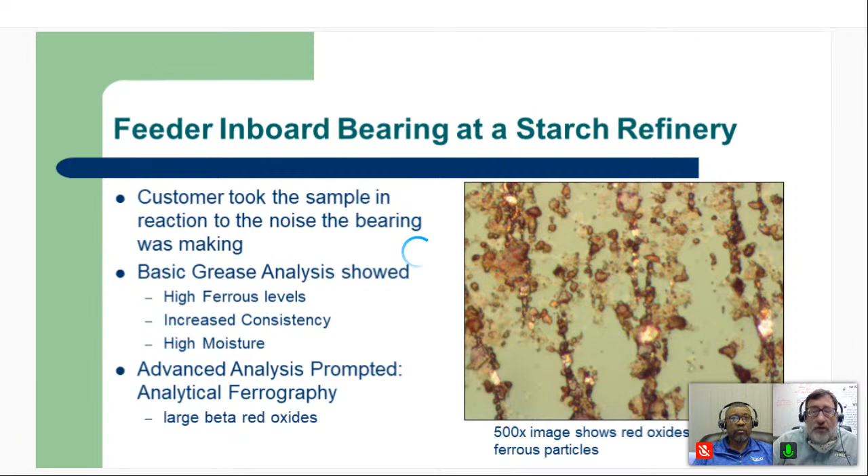That prompted some advanced analysis, and part of that follow-on test slate included analytical ferrography. Analytical ferrography showed some large beta red oxides. You can see a photograph here of those. These will form from poor lubricating conditions, for example, if you have high moisture levels in the load zone, and that corresponded to the ppm levels that we were able to measure in the grease for the moisture that had gotten into that bearing housing.

So what do we do about that? In this case, it was some grease flushing to try to clear out that accumulated moisture. Also inspecting the seals to see how the moisture is getting in the first place, and then identification of that ingression point and correcting that.

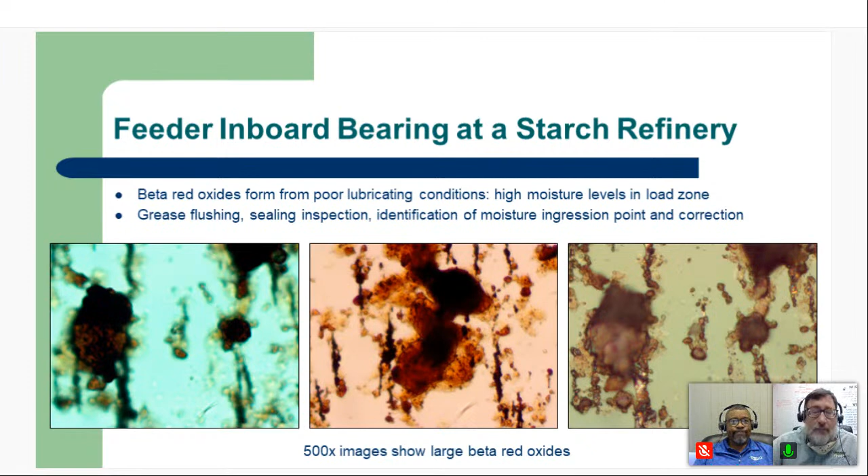So you can see some of these large beta red oxides present in the grease sample after being extracted and analyzed by analytical ferrography. The customer was able, in this case, to identify a specific lubrication issue and change regreasing activities.

That is in comparison to, let's say, if only ultrasound was used, or perhaps vibration analysis. They would detect that the bearing was indeed damaged, that some wear had taken place, and it would change some of the frequencies and ultrasound decibel levels you'd see, but not necessarily pinpoint the source of that.

And that's where grease analysis came in. It not only helps with this particular bearing, but also gives the customer information that can be used to improve bearing lubrication methods across the board for this particular component and others as well.

And then there was some follow-up grease analysis after these measures were taken that confirmed improved lubrication. And that's what really we want to see, is that we want to get beyond this initial event and have reassurance that it's not going to recur and that we've addressed the issues that led to it by improving lubrication.

So knowing about the issue here allowed them to have a plan, know the severity of the damage, and extend the bearing's operation until a planned outage was coming up.

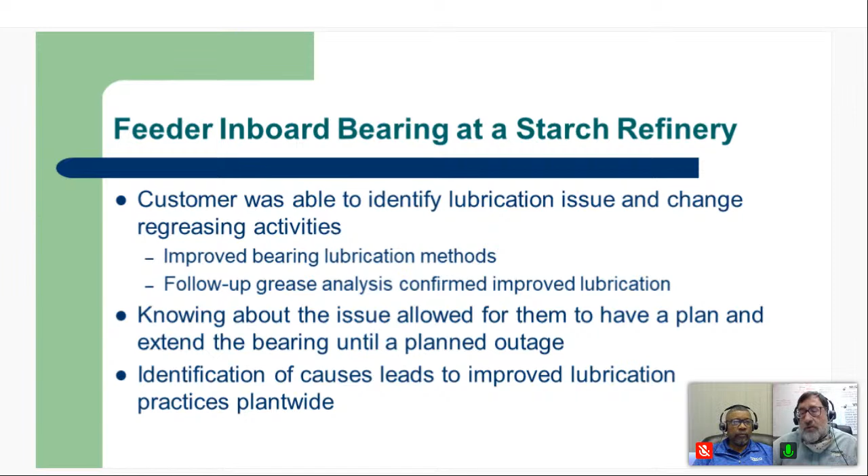And then, of course, we can take some of the learnings here and improve lubrication practices plant-wide. Not everybody does that, but that's one of the biggest values, is to take this knowledge and say, where else can it be applied? Where else do we have assets that are at risk because of that?

We have another one here. We do some root cause failure analysis, and a failed bearing was submitted to us. The customer held on to the bearing in this case, and then just sent us the sample from that failed bearing.

Again, we did the initial grease analysis and found high ferrous levels. We're using a tool called the FerroQ, which is an inductive coil measurement for greases. It's specific geometry works really well with the grease thief and that sampling methodology.

We also saw increased grease consistency here, and we see that sometimes when you get an accumulation of debris. Grease is basically a thickened oil when it comes down to it, and solids will thicken that. If you have wear solids or contaminant solids, they can cause a grease to get thicker as well, affecting its operation.

Our analysis also showed contamination, both environmental contamination, things from the surrounding area getting into the grease and into the bearing, but also mixing of greases. So the wrong grease had been added to this bearing as well.

So the ferrography showed us ferrous wear. You can see the particles lining up in those magnetic lines of force there. You've got some black oxides present, some small and fairly uniform black oxides.

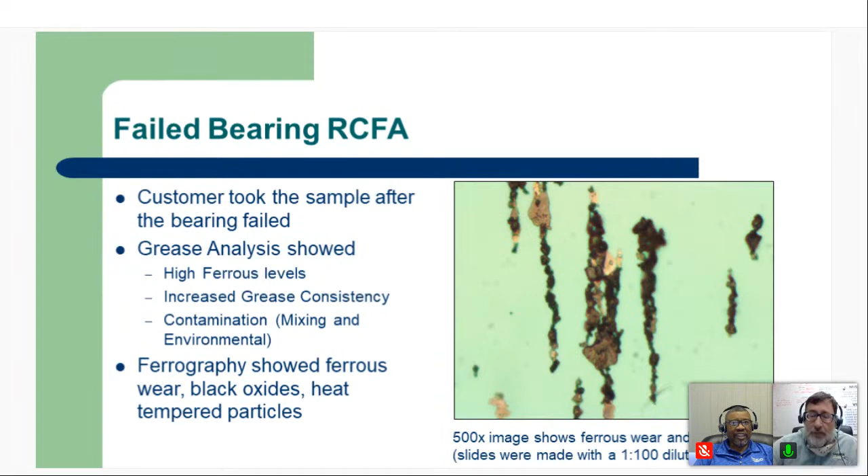Then you've got the black oxides, which are indicative of inadequate lubrication of the surfaces. It forms an oxide. And that's what we got there.

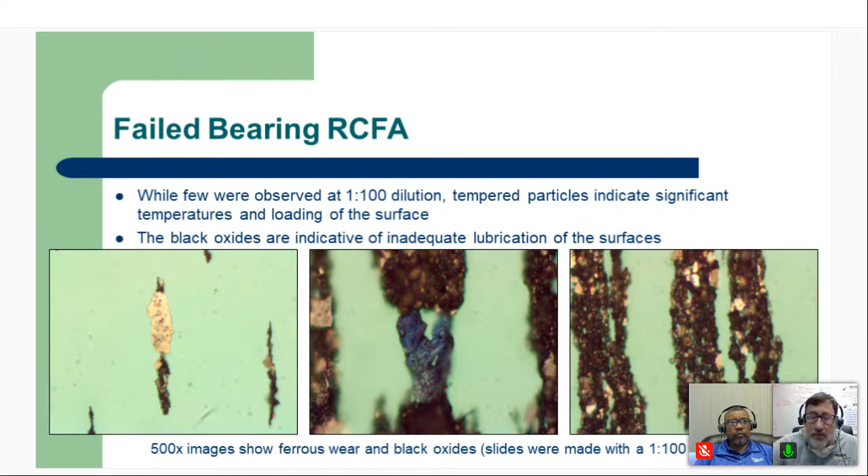So the customer is able to identify, again, a lubrication issue contributing to this particular failure, which helped them to enhance their greasing process or increase it.

And when they looked at the frequency that was needed here, from the calculations you can do, from the data we get from the grease, as well as the fact that this is a high contaminant environment, the frequency of greasing is high enough that they decided to install an auto luber, and then they can decrease the volume of grease being added, but increase its frequency. So more often they're pushing out the bad grease, pushing out the contaminants, protecting that bearing.

They did routine grease analysis, and that confirmed that this new setup gave them enhanced lubrication. And another thing, when you do that with an auto luber, you can actually optimize the frequency of lubrication using the grease analysis data by looking at the condition of the grease that's being purged out.

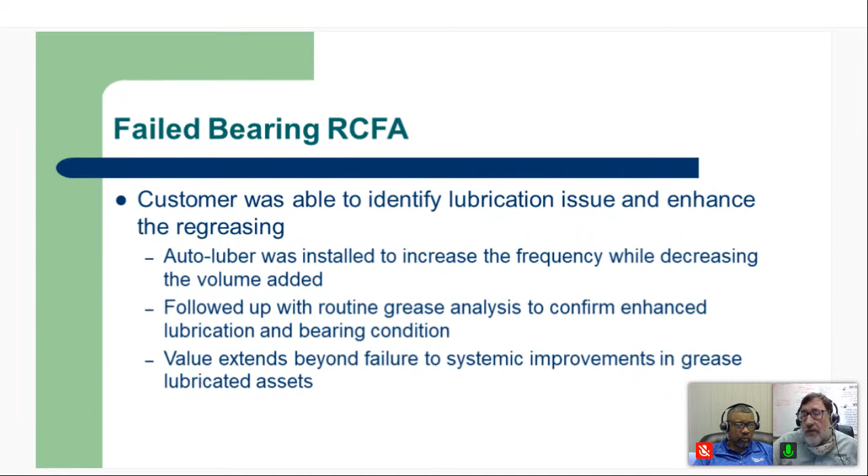And so the value then extends beyond just this one failure, this one bearing, to systemic improvements that can be made in grease lubricated assets across the organization. Got another one here, in this case, from a paper mill.

There's a high pressure feeder, and again, sample being taken after the bearing failed. We'd like the sample to be taken before the bearing fails, right? To find these sort of things, to look at these conditions and changing conditions ahead of time and take efforts to avoid the failure. But sometimes we're playing the catch-up game, and that's the case here.

Grease analysis showed, again, high ferrous concentration in the grease, an increased consistency, and then specifically the contamination here being a combination of moisture levels, which in a paper mill is always a battle, right? You always got high levels of water that you're fighting as it tries to get into your machine, bearings and so forth. High moisture levels, high environmental contaminants, as well as, again, mixing of greases.

And that just shows a lack of control in your lubrication process where either a supplier is giving you a different grease than what you're adding to it, or you've got multiple technicians using different greases. And it does create a problem with compatibility.

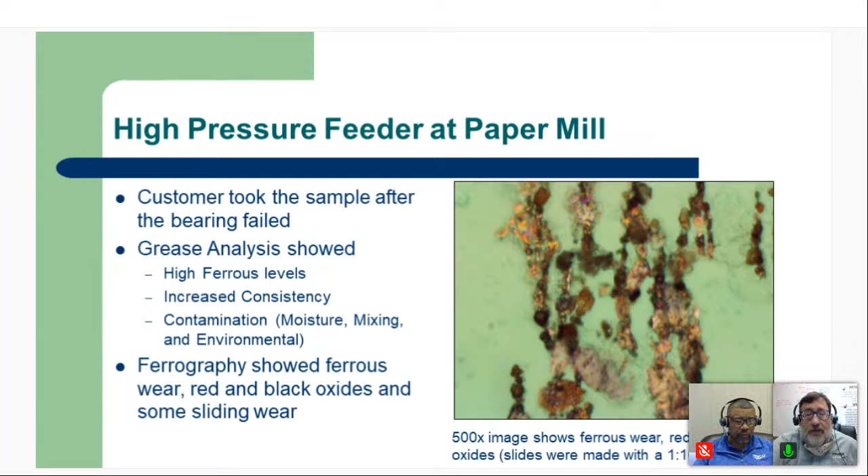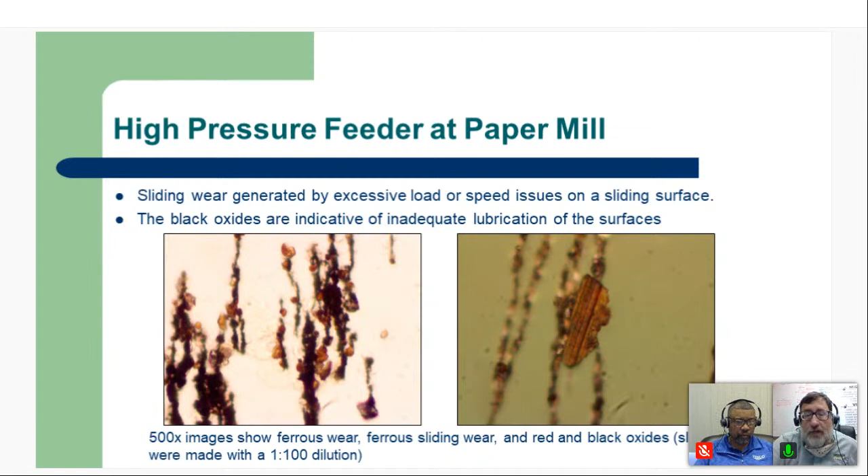So ferrography here showed the ferrous wear that we saw, some red and black oxides, and then some sliding wear, some larger sliding wear particles as well. The sliding wear gets generated by excessive load or speed issues on a sliding surface where you lose that hydrodynamic or elastohydrodynamic film, and you get asperity contact. The black oxides, that's inadequate lubrication of those surfaces. So we had a combination there, again, ferrous sliding wear, the red and black oxides that you see there.

As a result, the customer is then able to identify this as being a lubrication issue. And mixing lubricants has a large negative impact on asset life. Understanding that that's an issue within a facility, maybe not just with this asset, but other assets as well, gives folks an opportunity to address that.

In this case, the recommendation is to use some color-coded or visual indicators to remind the users of the correct grease for the equipment. There's some neat products out there for that, little silicone bands that can go around your grease zerk fittings, and you can put the same color band around the grease gun so that only that color designated grease gets inserted into that equipment, and that can really help when you're trying to make changes there.

Usually you got to add a shape too, because not everybody has that color acuity, and we want all of our technicians to be able to follow these human factored improvements.

But the routine grease analysis would find these issues, like when incorrect grease is added. And if it finds that early, because we're doing grease analysis routinely, we can see that prior to equipment damage, and it can be purged out.

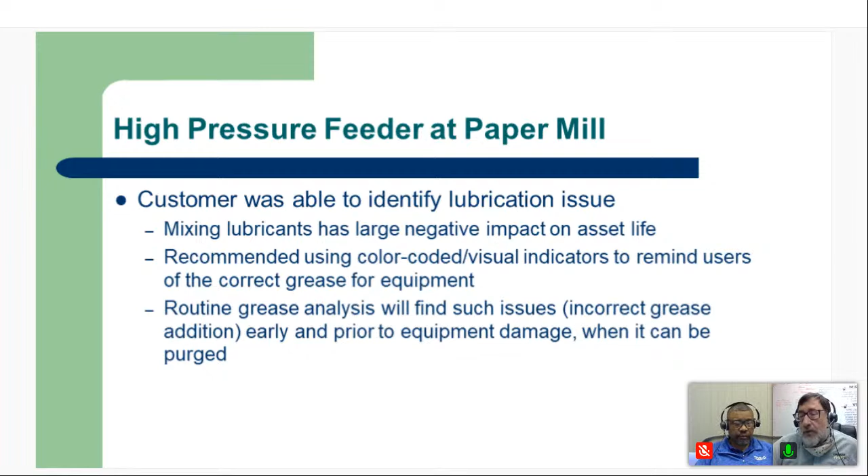So in this case, we had a failure, but it doesn't have to be a failure if we're getting in there to follow up with some more routine analysis and just take that effort to purge out the bad grease, purge out the contaminants, and extend that equipment life.

Here's a wind turbine main bearing, and this is one area that we've seen a lot of usage of grease analysis. Again, we started here with our basic analysis test slate, and we saw some high copper levels. So we're looking not only at the ferrous concentration, which is important in a lot of applications, but it's good to know also when your metallurgy kind of dictates that you need to be looking at your elemental concentration as well.

And more so in greases, we see that you get almost a pure ferrous metallurgy that you're dealing with. So the ferrous debris measurement really covers a lot of bases. But knowing when your bearings have non-ferrous components as well, it says, hey, let's look at that.

So from elemental spectroscopy, we had some high copper levels. We saw increased consistency again. And like I said, it shows up a lot when we have high wear levels.

And this is something that's different between oils and greases. Ray's going to talk more about some oil applications.

In oils, when you are generating wear, you tend to hit this equilibrium particle concentration where the particles are being produced, they settle out, they get filtered out, and they hit this certain level that may be going up over time. However, with greases, it's continuously accumulating, so the particles don't have anywhere to go. So you typically expect higher levels of wear, but knowing what those levels are and then what is considered excessive is important.

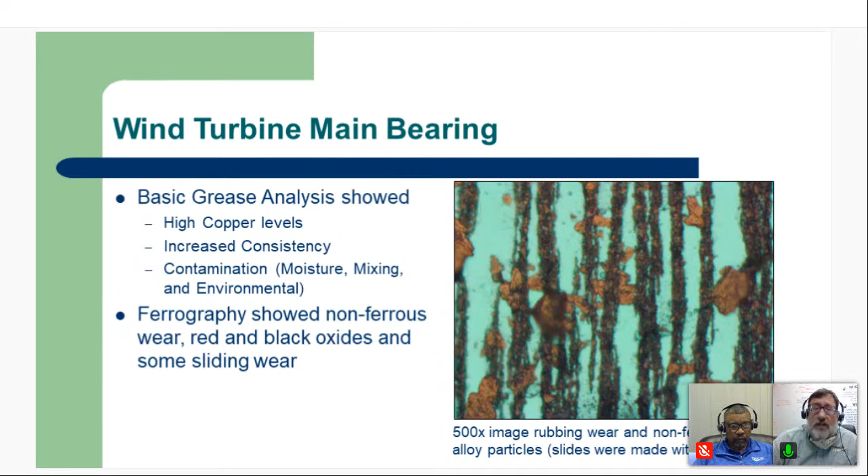We've got red and black oxides and some sliding wear from this main bearing. Some more pictures here. We had to do some dilutions. You can see some very large non-ferrous copper alloy wear, also quite a bit of rubbing wear there as well. And when you think about this being a ferrous bearing, where the rolling elements and raceways are ferrous, but the cage is copper alloy, you're having that rubbing contact to create that wear.

So you're going to get both the ferrous wear and the copper alloy wear. But obviously here, the copper alloy from the cage is producing the largest wear particles, the severe wear particles, and it really has our attention at first.

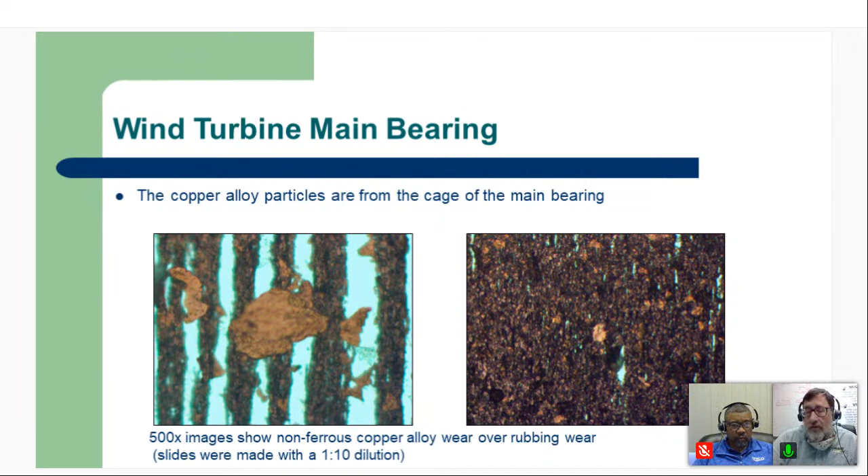So this customer is able to identify this wear issue, and it was again the lubrication condition causing the wear on the cage of that main bearing. You've got excessive quantities of particles that are actually self-feeding into the process, interfering with the effectiveness of the lubricant. They become almost like a lapping compound that increases the generation rate of the rubbing wear, leading to the formation of severe wear.

Cage wear in these large bearings is particularly concerning because it leads to a loss of structural integrity, and eventually you can have catastrophic bearing damage. So the elements start to skid. Sometimes if there's enough damage to the cage, the elements turn sideways, and we see that too. We see this huge sliding wear show up. Now, we didn't see that yet in this instance, but that's something that particular operator needs to think about.

This is what happens, and then ultimately you get a clearance loss. And that clearance, as it opens up on those main bearings with all the forces from those large blades spinning around, can really lead to catastrophic consequences.

So early detection could mean a low-cost up-tower repair. And if you can't fix something up-tower, that means you're bringing in a crane. You're bringing in a mobile crane, setting that up, and you're going to be spending about $300,000 for every event.

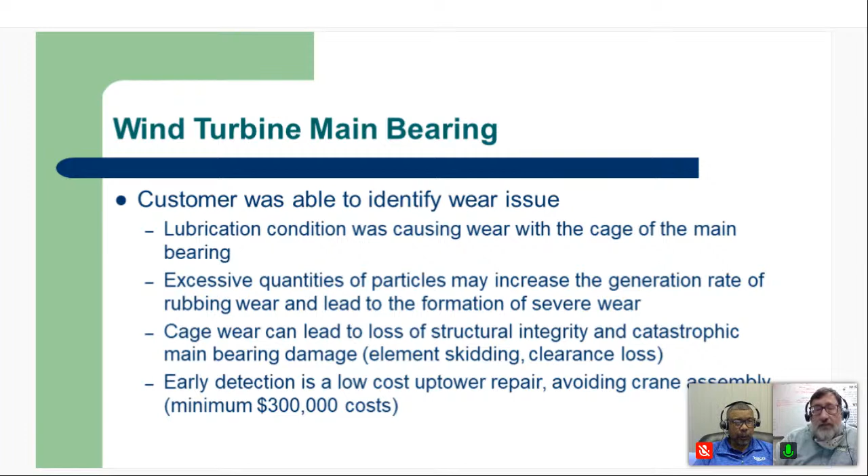I wanted to throw one more in here, which was a big recent one for us, on helicopter grease analysis.

Before we started here, Ray, Richard, and I were talking, and I mentioned how Ray was my first mentor in analytical ferrography.

And I remember that was one of the things he was telling me about—helicopter swash plate greases was one of the things, 30 years ago, that he was doing for some folks. I don't know whether it was Canadian military or who it was at that time, but he brought that up and shared that with me.

More recently, Boeing reached out to us. They were asked to optimize maintenance for the Chinook helicopters—these are the tandem rotor helicopters deployed around the world. The Canadian, the Dutch, the UK, and the US military went to Boeing and said, help us address the maintenance activities here. This is an aircraft that was designed in the late 1950s and went into production in the early 60s.

As I became part of this project, some of the maintenance manuals we were reviewing were dated back to 1962. So you've got maintenance practices that are a bit older than me anyway. Instead, it's like, well, let's base it off data—let's base it off what's actually happening in the field to these assets.

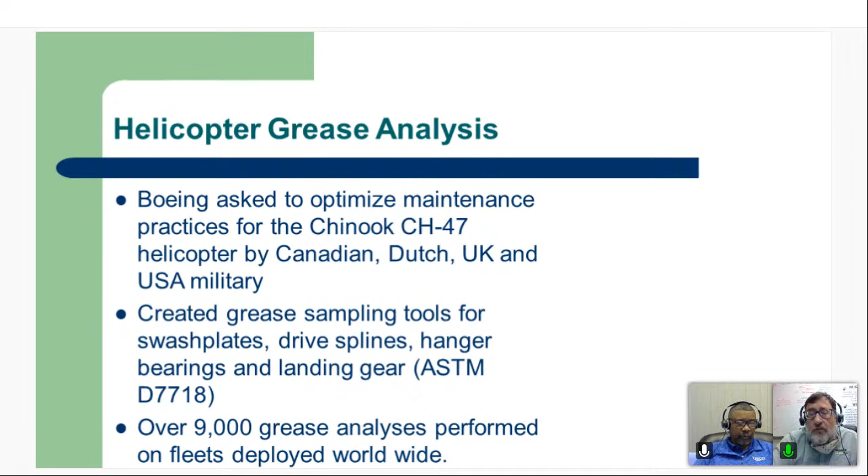As part of this project, we created grease sampling tools for the swash plates, the drive splines, the hanger bearings, and the landing gear, all following the ASTM standard D7718 for in-service grease sampling. We performed over 9,000 grease analyses across all these different fleets, from aircraft in different operating environments.

But this is what we did here. Maintenance intervals had been in place since 1962. The only modifications in that time had been in response to issues, perhaps a previous crash or a near miss type thing. And what would they do? They'd say, well, grease more often. So over time, without data, it was just, whatever it was, let's just grease more often.

So there was this opportunity to look at what is the condition of the grease. By doing so, and using those over 9,000 grease analyses that were done, we were able to reduce the number of lubrication tasks per 1,000 flight hours from 98 down to 56—almost cutting the amount of work in half. And we reduced service interruptions from 20 to just 10 every 1,000 flight hours. So basically, the aircraft is spending twice as much time in the field.

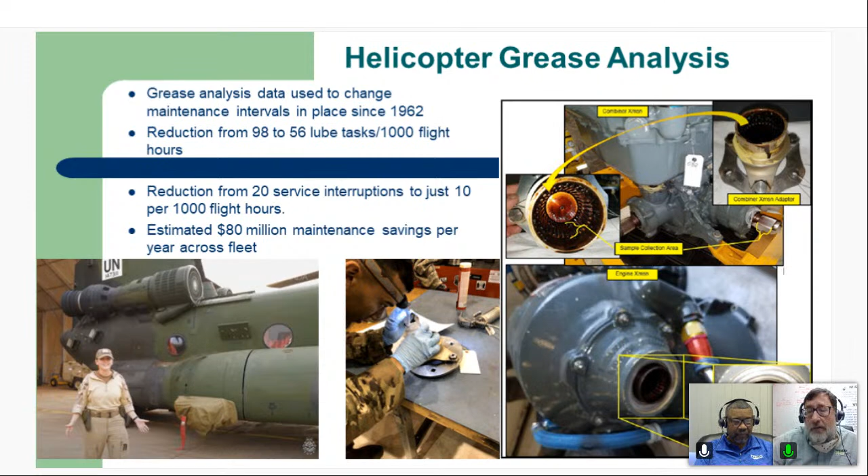So I want to hand that over to Ray and have him share his with us now.

Good job, Rich. That's exciting to see how it has bridged over from what we used to do back in the late 70s, early 80s with the U.S. Army, the Canadian Armed Forces, and then having you checking on these Chinooks, CH-47s.

That swash plate situation is a phenomenon where dust curls up and goes right back into the hub. If you notice helicopter designs today, they have what they call a frisbee on top of the hub, which prevents that type of situation from occurring. So since then, they don't have it as much as they used to, but at least they know what was going on and how to prevent that particular failure from occurring again.

And if I can comment, that frisbee, we had to move out of the way to get our grease sample. But in those analyses, we had seven parameters we were looking at. One was the silicon levels as an indication of sand and dust getting in there. There was maybe one situation, not in the swash plates, where dust was potentially a concern, where you'd have to purge the grease out for that. But most of it was oxidation, the grease coming to the end of its life, and we were changing it out based on that. So thanks for giving us that feedback.

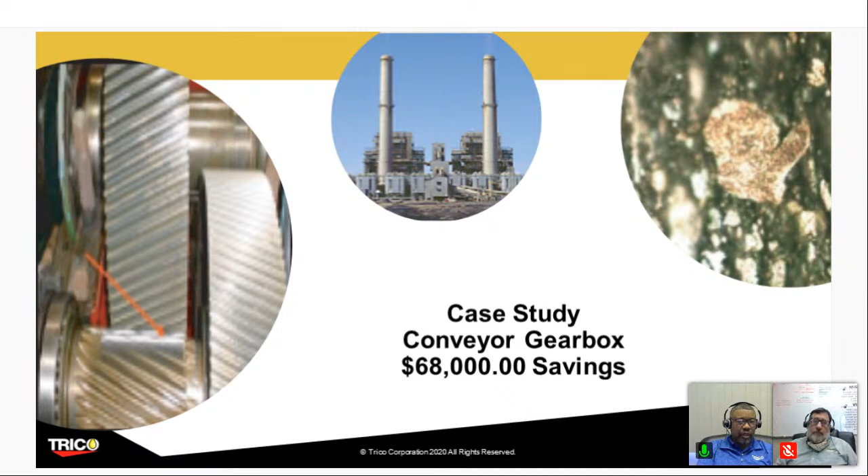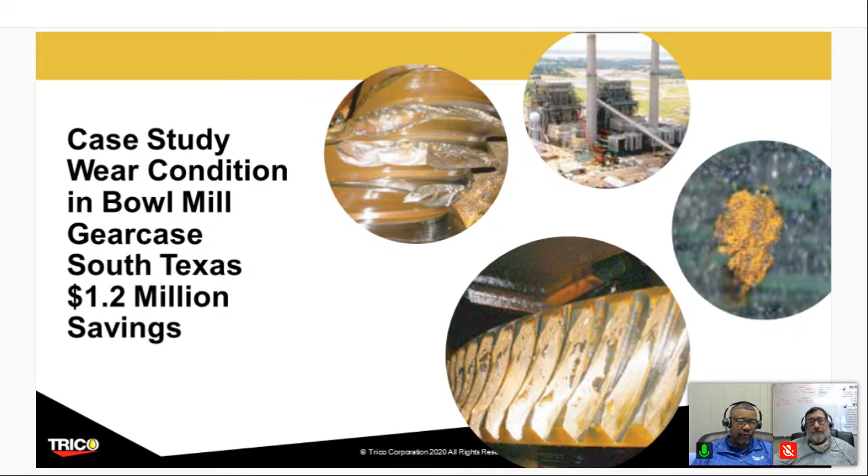In the next slide, I have the animation of the bowl mill, the technical drawings of it on the right side, and the related particles in the middle. This customer was very elated to be able to use the technology of ferrography for long periods of time. To this day, they've been a customer of ours for almost thirty-some years. So we have good relationships with this customer, and they believe in the technology. By virtue of being able to pinpoint exactly what's going on, it makes it that much easier and feasible to point the maintenance crew to the right areas of what's going on. In this market today, no one wants to spend time searching for where the problems are. They just want to know exactly where it is to fix it, because time is of the essence for the maintenance staff and what they do. So I just wanted to share that particular one with you.

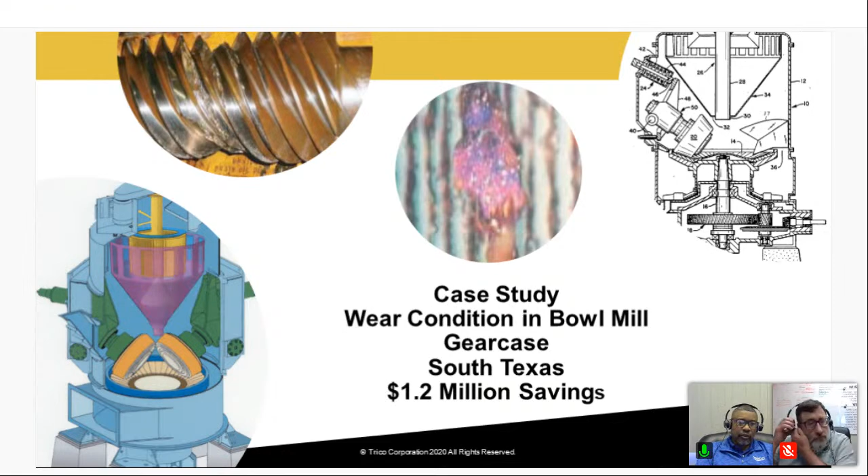We did this on a monthly schedule. They were able to send the samples to us, and this is at the NASA Goddard facility. They have one of the largest clean rooms in North America, I'd say. We were involved with them from the viewpoint of looking at this particular application. What they do is, if you remember the Hubble telescope, they were having problems—not in the beginning, but they found out about problems they had with regard to the polishing of the mirror.

And what happens, they had to go up and make these fixes in space. So what they're doing now is making sure that's not the case here, because this is the Webb telescope. And this telescope is going beyond the moon to take photographs of what's going on.

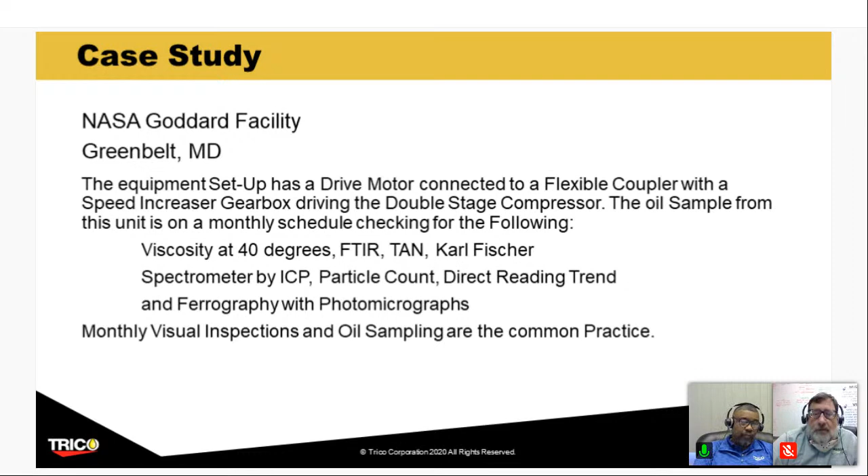So what happened is their clean room had issues with a combination of an electric motor drive, coupled with a coupling gearbox and a compressor. The compressor brings the temperature down into the clean room environment to make it super ultra clean, and having that environment allows them to polish the mirrors for the Webb telescope. It's named after James Webb, who was very influential in the Apollo program, an administrator in that area.

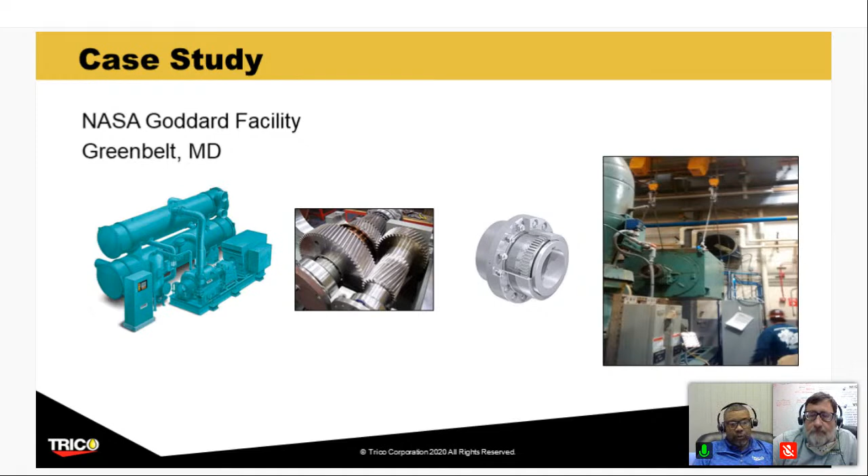So what you see here is a compressor, a gearbox, a coupler, and an electric motor. The electric motor was having difficulties, with oil all over the place that we were able to get sampling from. You can see it's a York double stage compressor. Funny enough, the town of York is where Rich is, so that's what helped me pick out one of these presentations, and I figured I'd give him a little kudos on that too.

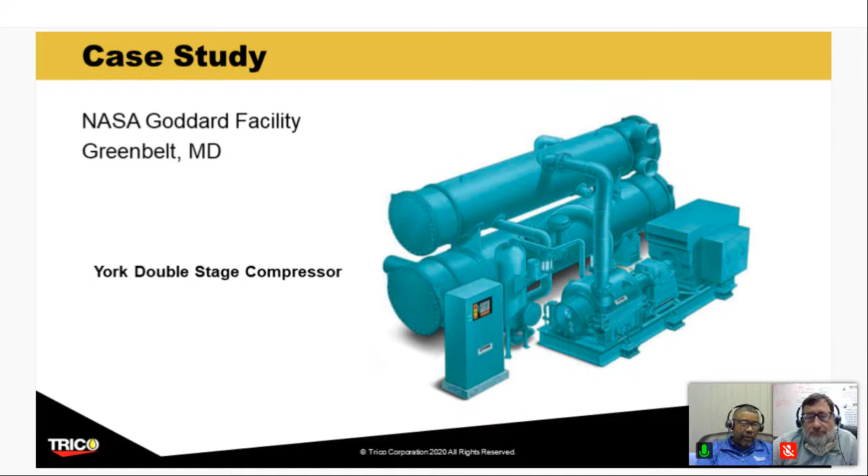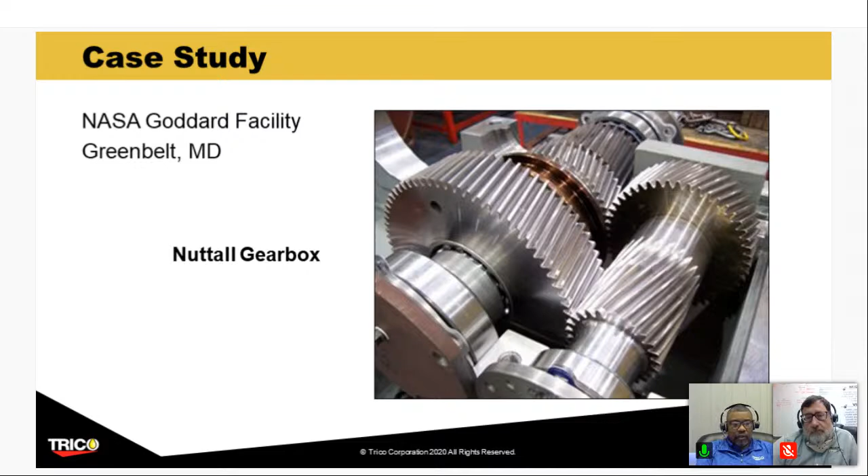But in this particular case, we were able to focus in on where the problem was, and that was from the area of the electric motor. It's a large, 4,000 horsepower motor, that type of thing.

This telescope was supposed to be up in space by this time, but there are delays, inspections, all kinds of different things, because they don't want to put up something they'll have to go and fix. Guess what? It's not a quick trip to the orbit of the Earth, it's a trip to the moon. This is where the Webb space telescope is going.

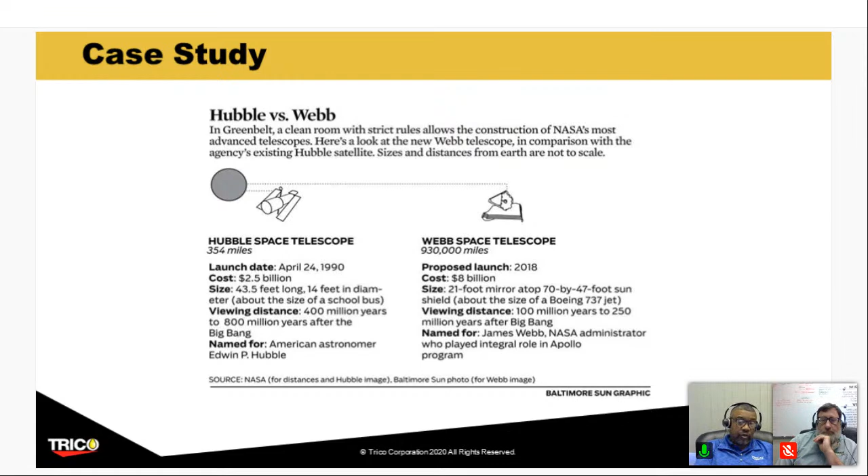So that's why there's so much contingency, so many different things going on to make sure everything is spot on perfect. The size of the Hubble is almost 43 feet long. For the Webb, it's almost 70 feet long, basically the size of a Boeing 737 jet.

In this case study, you can see where the Hubble telescope is, and guess what, the Webb telescope is going to be beyond the moon rather than encircling the orbit of the Earth. You can see this is the mirror of the Hubble, and these are the mirrors of the Webb space telescope. So you can see it's a dramatic difference in that direction.

So what happened here is whatever we were doing was basically messing up the timeframe of how fast they need to get this going. The good thing is we were planning and monitoring the situation. The first report showed a critical issue back in July of 2014. They were not planning on this, they weren't used to monitoring what was going on.

They had normals all the way across before, and all of a sudden they had a marginal, and then all of a sudden a critical occurred, both in the lubrication and the equipment condition basically was starting to have effects on the problem.

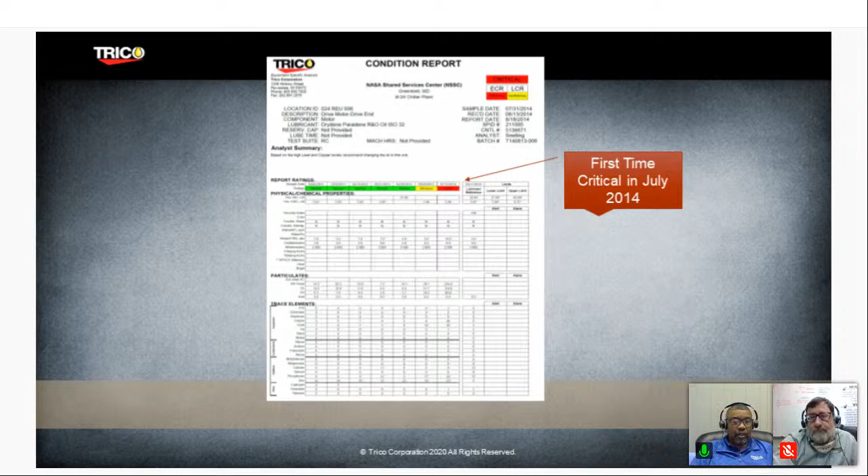So what we do is basically monitor and resample, because you don't want to err on this. You want to err on the side of caution, not on the side of shutting it down right away and messing up production. So we started trending the WPC with the DR, and we also started trending the wear metals with the ICP.

Both were indicating that the wear rate was going up. Rich had mentioned that we have an equilibrium situation with regards to taking analysis. So every time we have a sample, it basically gets to a normal level, and then the larger particles start to trend upwards. This is what you're monitoring here, the larger particles going up in this direction. On the spectral side, we're also trending the smaller particles that are going up too, so not only are we getting large, but we're also getting small, and that tells us what's going on in the situation.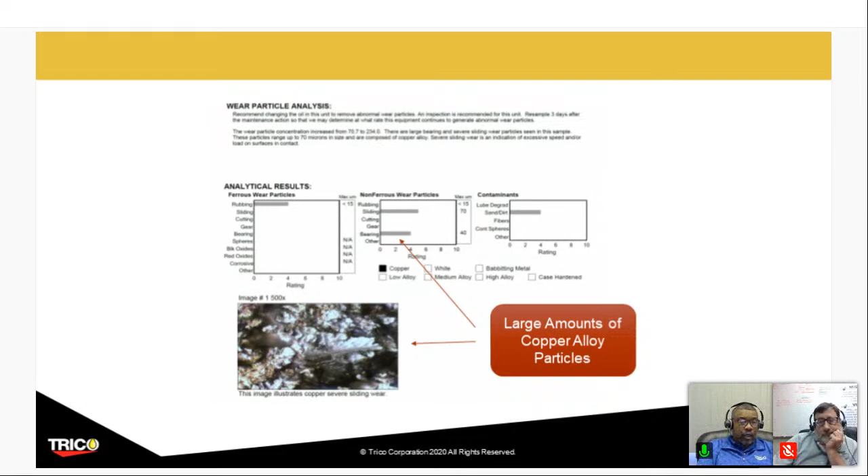So we told them that they needed to take a quick look at what's going on, and they couldn't afford the time frame to do so. So literally what they did was keep changing the oil every few months just to limp this thing along, because they wanted to keep the clean room environment clean, and we're praying and hoping nothing shuts them down. They had backups after backups in play, but they still need to use the machine for bringing the torr levels down to a certain area. So we saw three criticals in a two-year span with oil changes occurring.

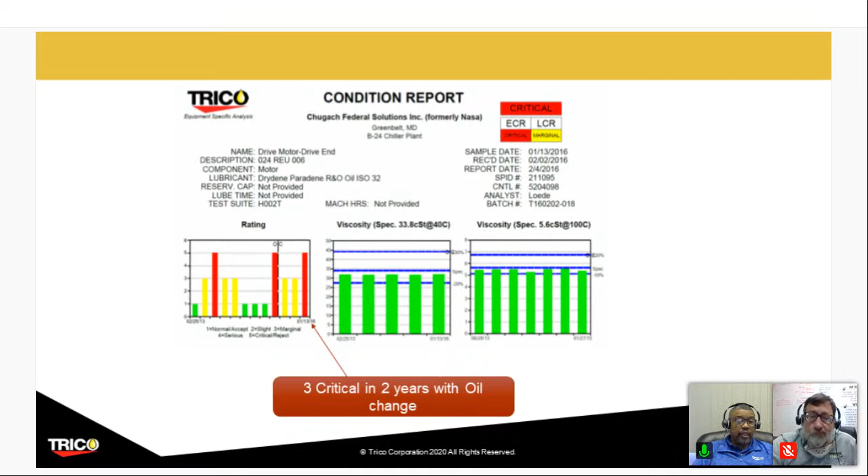Now, once we saw that last critical with these large, humongous sized particles, we said, guys, you're going to have to make a move. Something's going on where the particle count is getting really elevated. The wear metals, the contaminants, everything is starting to climb up.

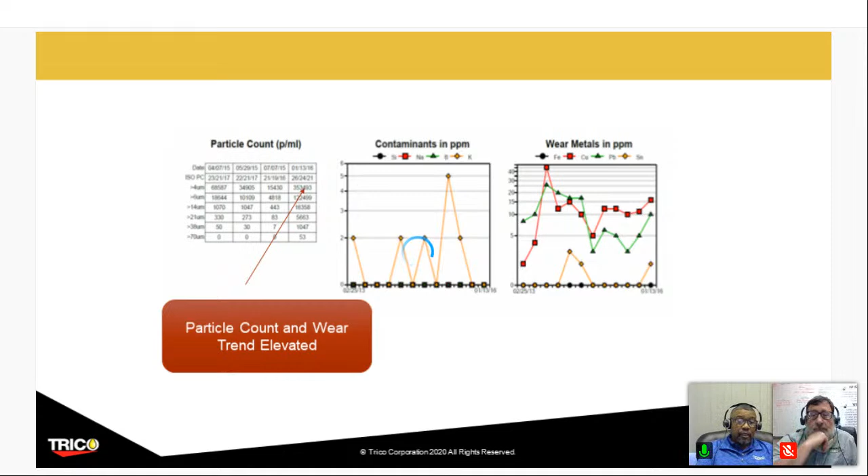So we provided a report. We saw the particle images. We said, come on guys, this thing is laden with all kinds of copper alloy. If you keep going this way, you're going to have a catastrophic failure, and you don't want that. That could mess up the situation with debris and contaminants flying possibly back into the clean room environment. Yes Rich, you were looking... oh, I thought you were going to ask a question. So you could see there were different types of photos: large copper alloy, bearing wear particles.

The thing I noticed when Rich was showing his photomicrographs of the red oxide, there's a phenomenon you have to make sure of. Sometimes these red oxides may look like metal, and you must turn off the top light and turn on the bottom light to actually see the light go through the red oxides to indicate that it's red oxide. These are different tidbits you have to know in terms of monitoring the ferrography, the photos, the particles in analytical ferrography. So that's part of what we teach sometimes in our classroom, some of the tidbits to notice what's going on.

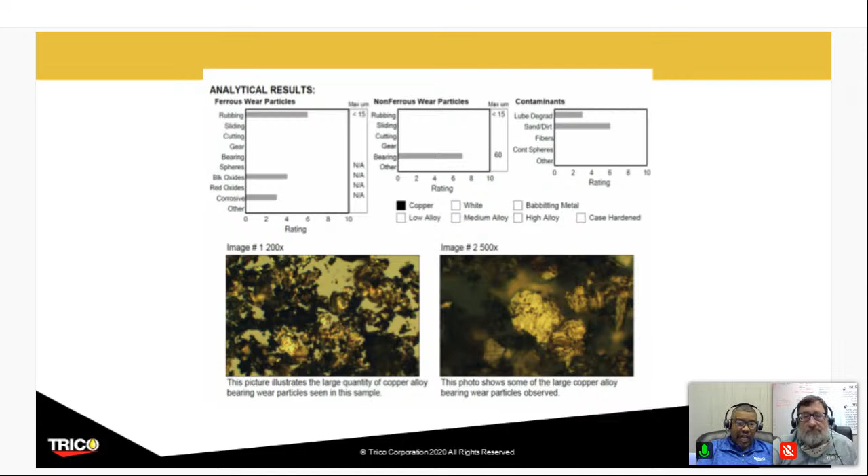But these photomicrographs are at 200x, this one's at 500x. So you've got to know what the magnifications are, what the dilution factors might come into play, and so forth. And mind you, this is oil related. You can see they're not lined up in strings of ferrous debris. They're all copper alloy, and that's not a good sign, if you know what I mean. So when we saw that, we said, listen guys, we've got to start figuring out what's going on.

So they stopped, took it apart, and basically looked at the electric motor. What they found was that the cost for doing this was not exactly what they wanted to spend, but it beats having to spend $8 billion on a lost telescope, if you know what I mean. So that's a little nothing compared to $8 billion, $80,000.

So they scheduled the maintenance and got it repaired. Then we asked the repair people, with NASA's permission obviously, can you at least give us some photos of what you saw, what transpired, what kind of parts are broken, if any. Typically most customers don't reply in that fashion because they like to keep that buried and not admit that any of their machines are running imperfectly. But the vendor and the government said not a problem - this is a good learning lesson tool, so we're going to pass it on to you, and that's what we saw here.

So the awareness of the drive motor issue was labeled on the watch list. This motor was about 31 years old, but it was scheduled for repair. The repair happened quicker than they anticipated, so it wasn't budgeted for the upcoming year. But after the latest critical review, they said let's get this all squared away, and we would not lose any downtime whatsoever. So our investigation, along with theirs, indicated that they needed to filter their oil coming into the facility.

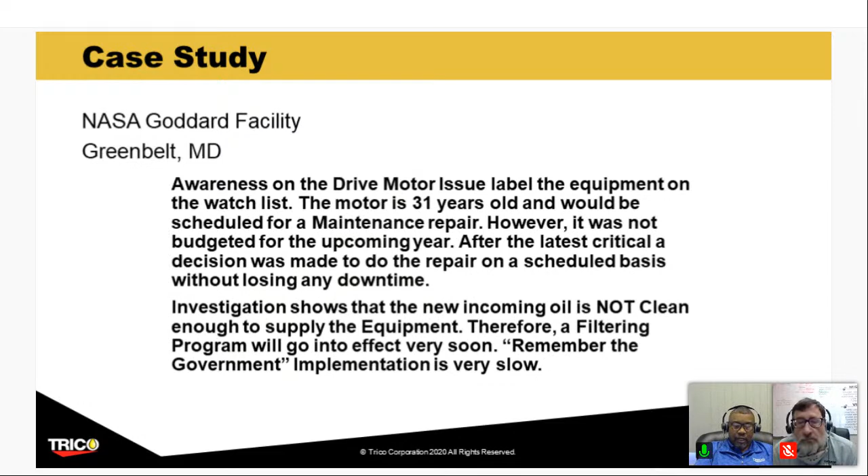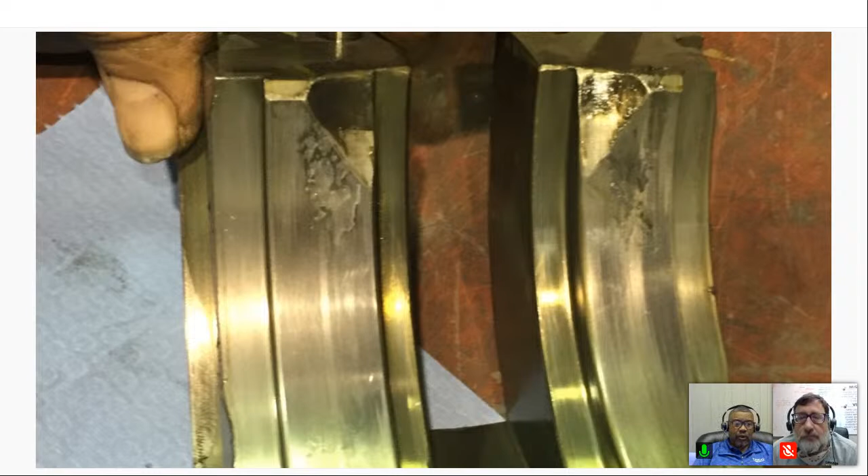So the next few slides are just little indicators of what the parts looked like after they did their inspections from a maintenance viewpoint. As you can see, there's some really gouging metal from their bearing area, and you can see it's obviously copper alloy from these bearings here. You can see this one is a drive end - that's what DE stands for - where you can see more damage going on with the bearings themselves.

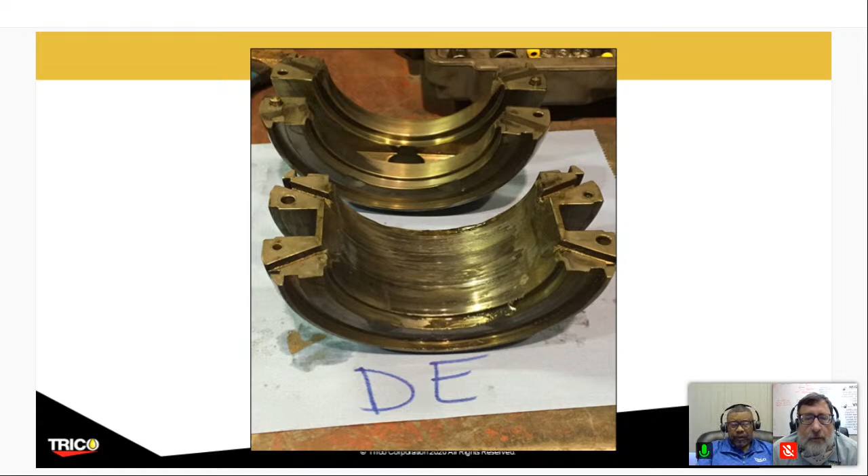Again, copper alloy material, just showing what's going on - you can see all these different catastrophic type situations that could occur. You can see how it almost just slides on the bearing right there, and the gouging that's going on. That's where you see a lot of what I call severe sliding wear on the copper particles. We were measuring 70 to 90 microns in size over a period of time.

So they basically cut it too close, in my opinion, for condition monitoring. This is basically a repair situation, and it's not what I call predictive maintenance in any way - it's completely opposite of that, if you know what I mean. It's almost to the term of failure analysis, which Rich was talking about earlier, but the motor was still working in regards. Here's another copper alloy material, basically shedding away into the lubricant itself.

So with that, I know we have plenty of time, but I was hoping some questions might come up. But I just want to first thank... well, let me show you.

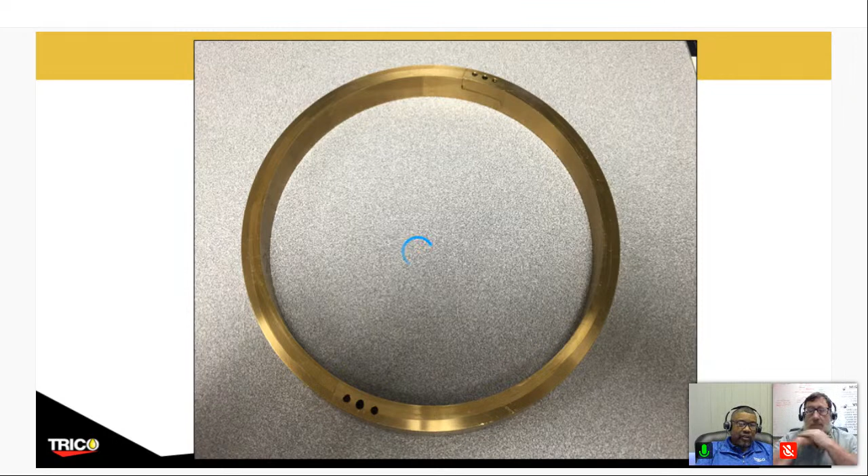So when I saw this, I enjoyed the fact that I was able to be part of this in terms of seeing this take off soon.

And when it does get successfully deployed, I'd be proud to say I was involved with the Webb telescope, hopefully working properly and giving us the images we're looking for in regards to deep space activity.

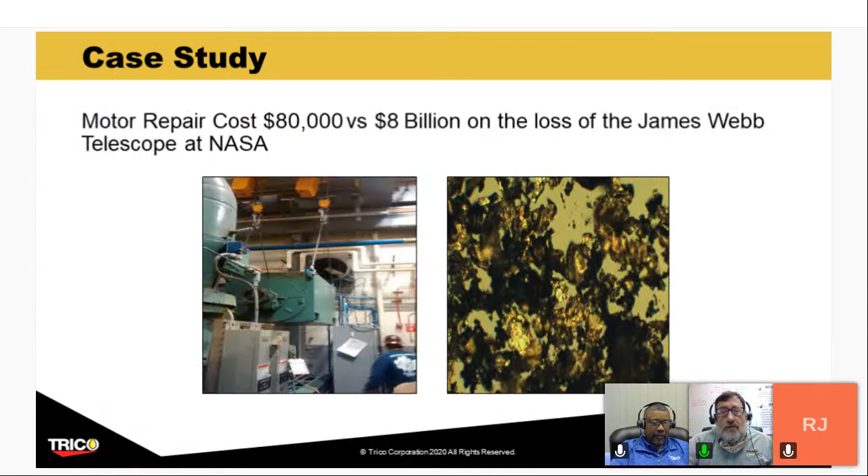Hey, if we could go backwards a little bit, I wanted to point out something in your presentation, and maybe I'll see if I can take us back where I want us to go here. When you were talking about this York compressor, thanks for the York shout out there, you mentioned too the flexible coupler. I just wanted to mention that, and you shared with us oil analysis from the motor side, that was what you were focusing on there. But obviously then there's the chiller, and it has lubrication, and that's a very complex lubrication system there with the chiller fluid and the oil, and they get together and things like that. But on that coupler, that really caught my attention. I was talking to Richard before we started here, because soon after you trained me and set me up, and we built that laboratory, and you went back to Ohio.

I was asked to investigate a problem with Amerigear flexible couplers, which are grease lubricated. In my plant, they were feed water pump couplers, coupling a large steam turbine to a feed water pump. We were having issues, and the interesting thing was that the mechanics, when they looked at it, identified that the couplings were rusting out, because they saw a reddish dust instead of the grease they knew they had put in when they set this up. They said, well, the grease is gone and now they're rusting.

That gave me an opportunity to look at this further, to take the residue and find that in fact the grease is still there. I found evidence of the grease, but the particulate was a red and black oxide, very uniform, and clearly a sign of fretting.

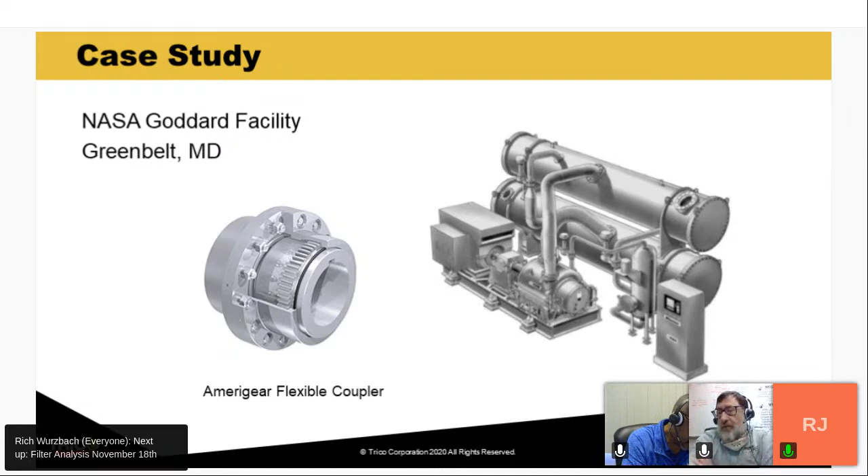That's pretty exciting because we've noticed that sometimes folks send in filters, but it's a bit of a mess - the oil's leaking out everywhere, the filter gets smashed, some of the data is lost. So we're going to talk about a way to capture that at the site as you're disassembling your filters, putting them into a container, an apparatus, a kit we've developed that helps you gather the oil condition as well as retain the condition of the filters. Recently we've been finding that the shape, the damage to the filter, tells a lot of the story about what led to it, what happened, and what you need to do differently to protect your equipment in the future. So we're going to share that, and I'm looking forward to that.